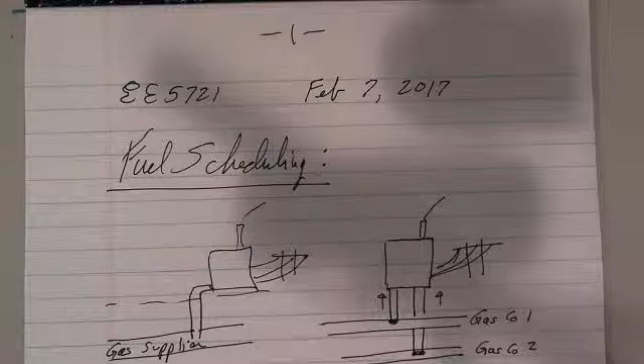But what we're gonna do today is we're gonna talk about fuel scheduling. We're gonna deal in the beginning here with the kinds of contracts that they deal with gas suppliers.

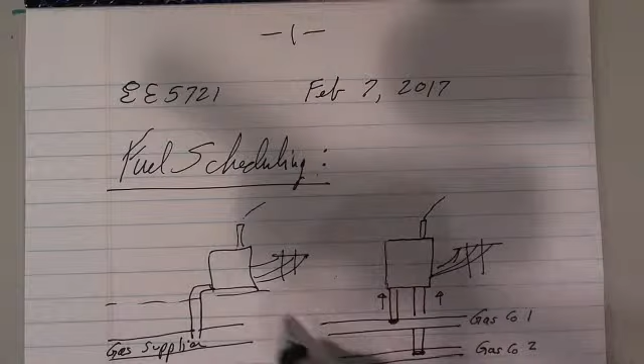So once again, we've got a gas pipeline. This may not be the only plant that's being supplied by this gas pipeline, and this one has two pipelines, but there's a capacity. Let's put something in red here. There's a capacity restriction on the pipeline itself. We'll put two arrows like that. In other words, you can only push so much gas through this pipeline, but that's sort of understandable.

And by the way, the gas pipelines are very long distance. They run from the Gulf states like Texas, Mississippi, Alabama, even Florida, way up into the northern parts of the United States. In addition, there are gas suppliers in Canada that have gas pipelines that come down into the state of Minnesota, run through Minnesota, cross into Wisconsin, up through the Upper Peninsula of Michigan, and down into the state of Michigan. So there are gas pipelines coming both directions into the U.S. to supply large amounts of gas.

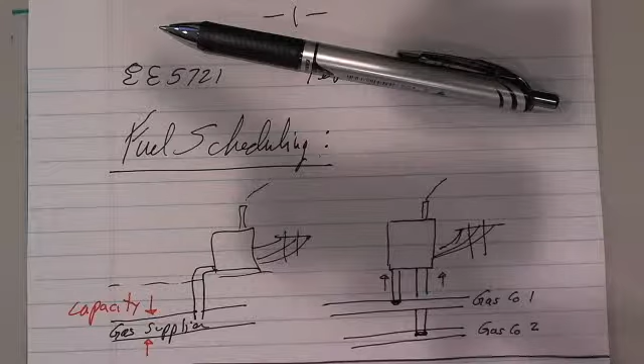I'm chuckling because during the 1970s, early 1980s, Ronald Reagan was president, and suddenly he said, we're not going to be selling certain kinds of things to Russia. He was a very hardline president, and yours truly, that's me, had a contract with a company in Europe, and we weren't selling anything to Russia, but they were imposing all kinds of rules, and this company was going to sell the software product that we were supplying to them. They were going to sell it on a system that was going to go to one of the other so-called, I use this term because it's an old, completely outworn term, communist bloc countries. Well, countries like Russia and its eastern countries around it, and we got caught up in one of these things. But it was originally because of this gas pipeline, huge gas pipeline they were bringing in from Russia.

So it's a major business. Now today in the United States, we're getting gas not just by putting a pipe down into a big bubble of gas underground and then pumping it out, but we're doing what they call fracking, where they cause the gas to be released by minerals, shale, and so forth underground. And this has produced a huge amount of gas, and the U.S. is now starting to export the gas by liquefying it. They liquefy it and then they put it on ships that take these special containers to Europe, to Japan, and so forth. So natural gas is a big commodity.

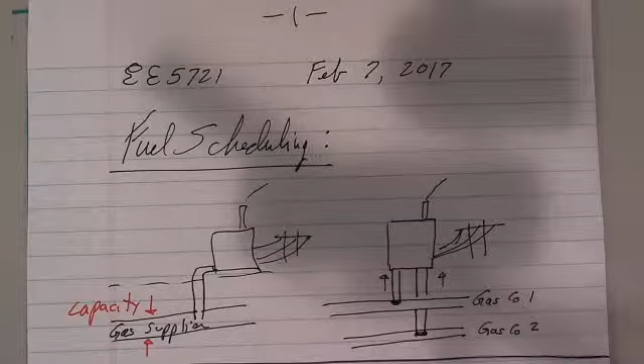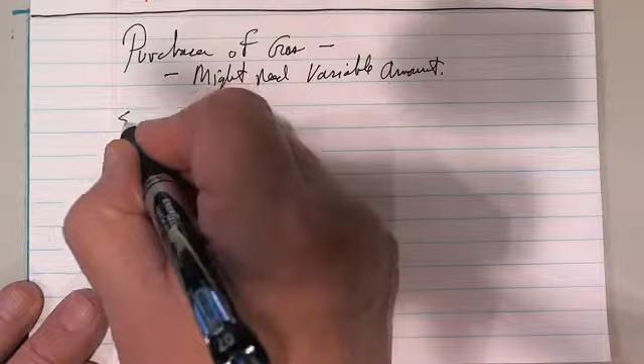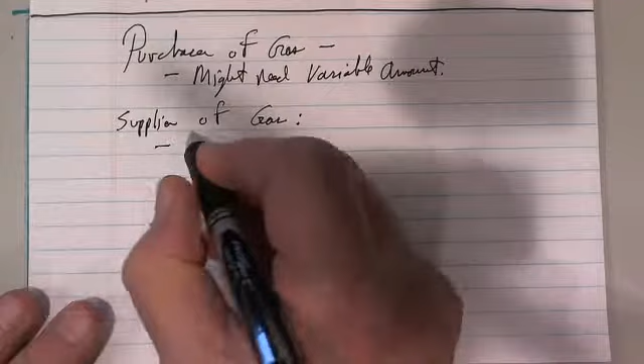All right, so here's the other problem. The natural gas supplier— let me say the purchaser of gas might need a variable amount, because of the load. Because the electrical load goes up and down, and as the load goes up, the generators call for more BTU per hour, which translates down into more cubic feet of gas per hour going into the plant. So they might need a variable amount. But the supplier of gas is nervous about and would like to supply a fixed total. Let's just write cubic feet. Okay, fixed total cubic feet.

And it's very interesting. They have worked on this for a while, and they've come up with a term. And the way I'm gonna show you this is that later on we'll realize that the term itself is kind of a misnomer. It doesn't really say it right. So we'll put it in quotes: a take or pay contract.

If you buy gas, the initial thing says, okay, we specify—let's say Q is the original quantity, cubic feet of gas. That's in the contract. It says you're going to buy so many, 100,000 or a million cubic feet of gas. And it's got a time on it. Okay, so let's say we're negotiating. It says by end of the day tomorrow, or by the end of the week, or something like that.

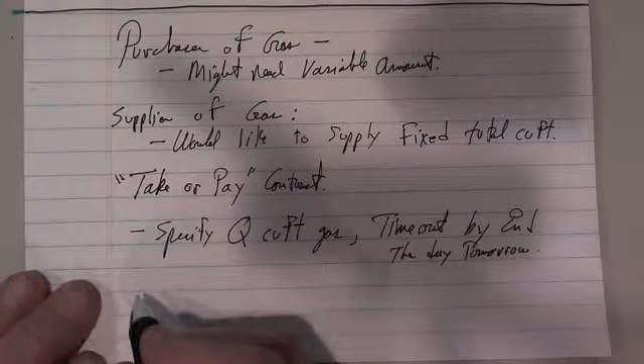Now here's the rub. Take-or-pay says: if purchaser does not take Q, they pay anyway. So sometimes I used to say this should be called take-and-pay, but effectively what it says is you agreed to take Q, and suppose the load is down and so forth, and the purchaser says, yeah, I know I agreed to buy Q, but I don't need it, and the supplier says, that's too bad, you're going to pay for that. You're paying for the whole contract. And whatever gas you don't take, the supplier can now deliver to somebody else.

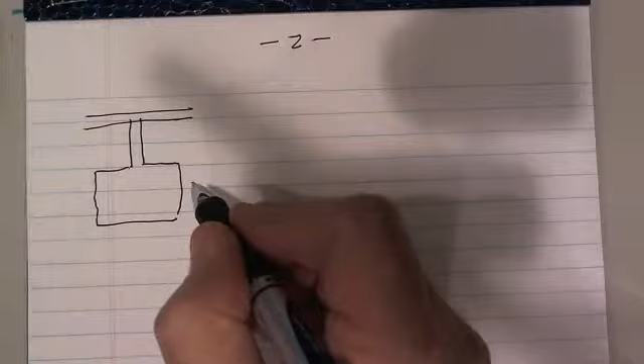One thing that is also part of this - the natural gas system is nice for the following reason. You've got a gas pipeline like this, and you can have a pipe that just goes down into a big storage tank in the ground. Well, they don't build a tank out of cement or anything - it's usually an abandoned mine, for example, where they can pump gas into it and build the pressure up, and it doesn't leak out. It's hundreds of feet below ground. So they can pump gas in, then later on take it out. So it's storage.

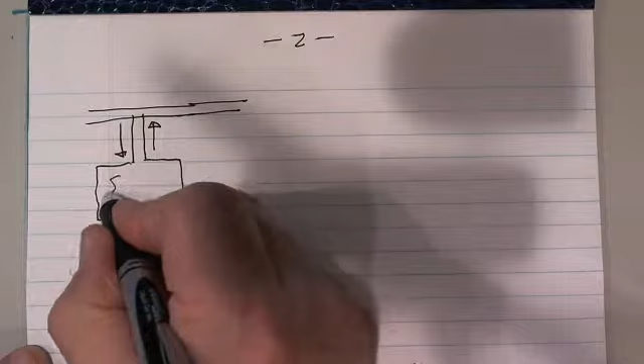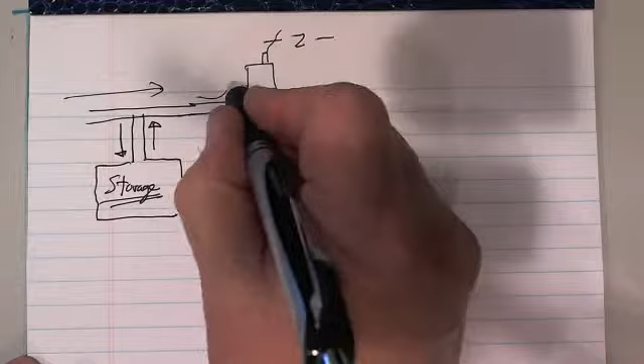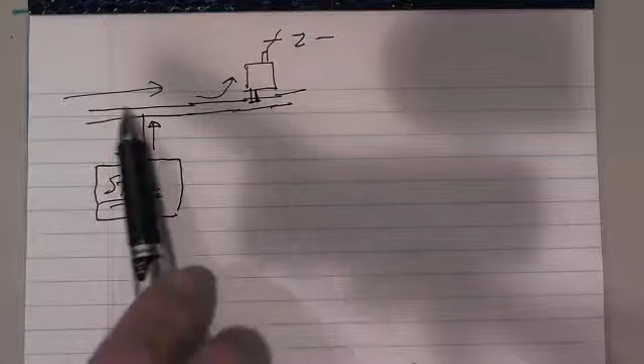And storage means they can be running the pipeline off-hours into storage near the load, and then take it from storage. So if you're running a power plant over here, here's our power plant, and we've got a contract to buy here. Here's our pipe coming in, and normally the gas comes down into the plant, but we contracted to buy so many cubic feet, and we're not going to be able to use it by the end of the contract. Well, the supplier can then put it into storage and sell it to somebody else. I mean, it seems unfair, but that's the way these contracts are set up.

I was looking at Wikipedia, a little discussion of it, and they point out that once you decide you can't buy all the Q, they may charge you a slightly lower price, but you still have to pay for the gas that you didn't use.

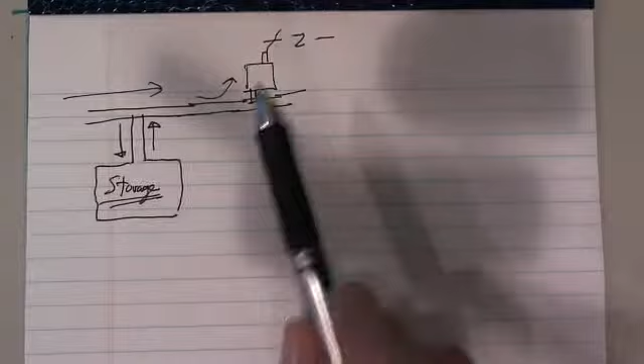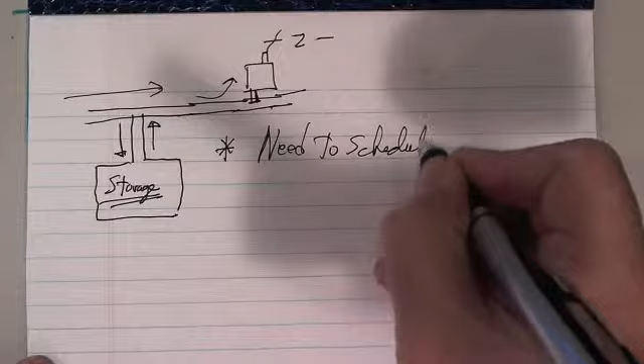And so it pays to schedule things. Okay, so the important takeaway here - we'll put a little star - is that we need to schedule the power plant consumption to use the cubic feet in the time period of the contract. We'll put an exclamation point at the end there. So you need to make sure that you use the gas, because if you don't, you're still paying for it. So that's like taking money and just throwing it out the window, if you will.

It says I'm not going to get the gas - the supplier is going to give it to somebody else, but I still have to pay for it. It's like paying a penalty, and you don't want to do that. That runs your whole plant efficiency, your whole system efficiency down. So this is a very important thing on gas.

Now you still have similar problems with fuel scheduling - another one, and we have a homework problem. I will talk about this week's homework.

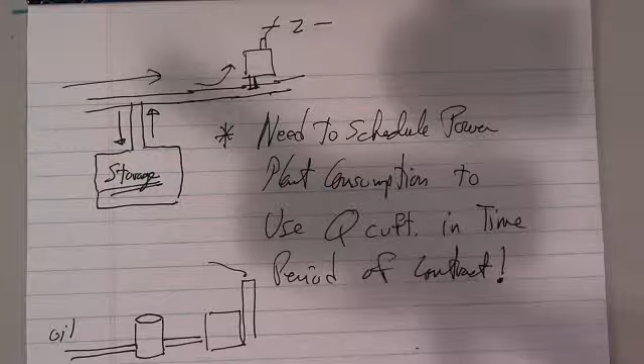If you have a tank at your facility, we'll put the standard stack here, and so we've got oil coming up in a pipeline. We're getting this oil, and we're pushing it through, and we can put it into a tank, and then we can use it at a greater rate than the oil can be delivered in the pipeline.

So this is a scheduling problem that we'd like to work on, and you understand here in this case the oil tank is owned by the power company.

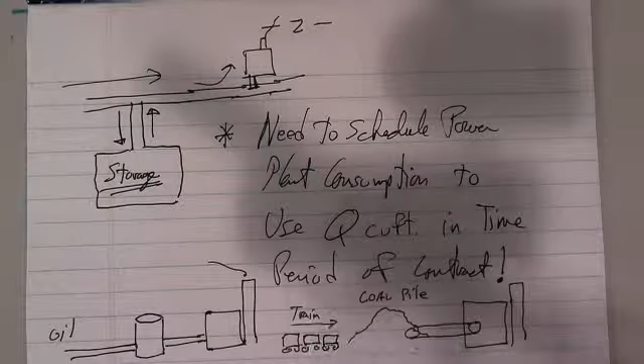If your plant is near a river, they will deliver coal on river barges. I don't know if they still do that on the Mississippi or not. They certainly used to.

And then one of the hazards, and it's a hazard for the train too, but especially for the barge traffic, is to get the coal through when the river might freeze. And if the river freezes and you can't get the coal, then you got to shut the plant down.

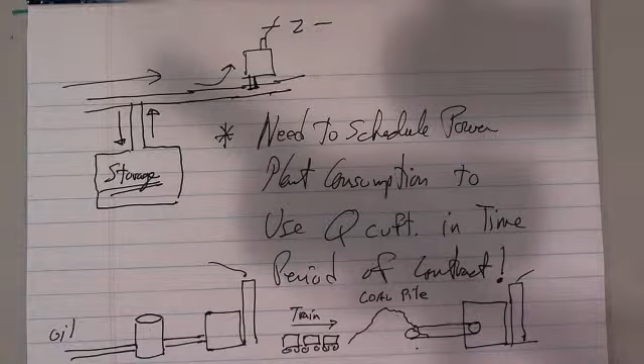So there's scheduling of the coal pile. There's scheduling of an oil tank. We could write this here: oil tank. And to some extent, but generally the storage is owned by the gas company, not the power company. So the gas company stores and releases gas for its own purposes, and you don't get to schedule it. Okay, so this is the so-called fuel scheduling problem.

Now, without going into it too much, I'm going to go into the Lagrange formulation. We're going to have a whole bunch of power plants over here, and they're going to supply power into the grid. And then I have another one over here I'll call that T.

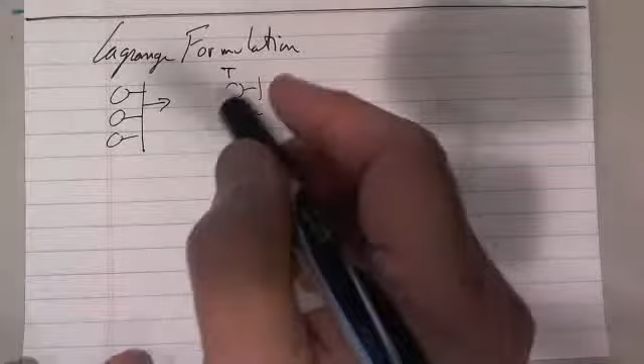That's my take or pay. Take or pay, as I said before. Take and pay would be a better way, but this doesn't ring. So anyway, take or pay is this T unit here, and it's also supplying power into the grid. And we're gonna, let's say this goes 1 to N over here.

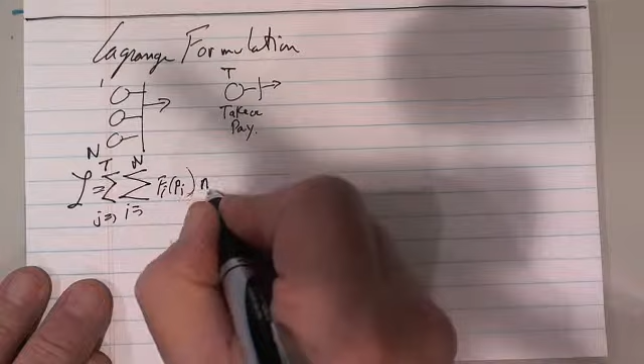And the Lagrangian is going to say, well, look, it's the same problem that we've always had on plants like this, where we just have Fi of Pi. There's a new variable that comes along, and the fact that we're going to be optimizing over a time horizon, j equals 1 to, let's say, a time horizon like t, i equals 1 to n. I'm going to have an nj. And nj is equal to the number of hours in the period j.

So, for example, I could have 4-hour periods, so I'd have 6 of them per day. Or I could have 8-hour periods, just 3 per day. I could have a daytime, an evening, and a morning time, just to have 3 different periods during the day. Or you can go right down to 1. You can have 24 time periods and so forth.

So that says minimize, do the standard economic dispatch up here. And I'm going to have a lambda for each period. This is a lot like the unit commitment, j equals 1 to t, and I'm going to say lambda sub j times p load j minus the sum i equals 1 to n, pij minus ptj. Well, this is p of t coming out of the take or pay plant. So that all the generation must equal the load.

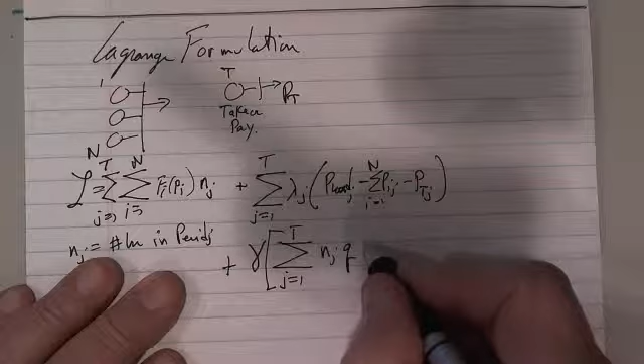Same old thing we did before. But now I'm going to add another constraint that looks like this. It's got another Lagrange multiplier called gamma, and I'm going to multiply that, and I'm going to say over all the time periods, j equals 1 to t of nj q, q of tj minus, and you can write it as I wrote it in the text, we'll write it this way, q total. So this is the constraint. We'll put this in red.

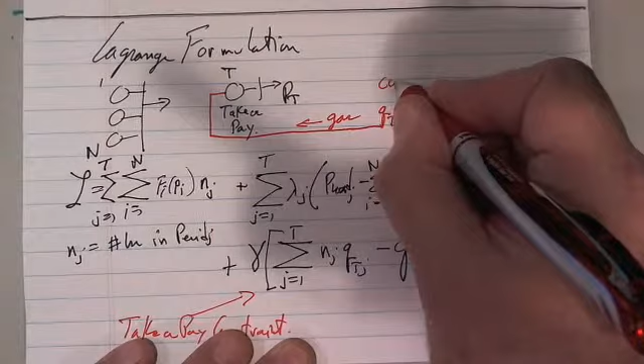This is the take or pay constraint. It says over this time horizon t, Q of t is the amount of gas. Let's draw that over here. Here's gas going into the plant, and it's going to draw Q of t, which is the quantity, measured in cubic feet per hour, and that's a function of P of t of j.

And it simply says I have to have a function like this, so I should have put Q of t of P of t sub j in here. So that says I sum up the gas used in each of the time periods times n, and I add that all up, and that better equal the total, if this is 1 day or 1 week, whatever the total time is, that's the contract amount.

Okay, we can put this in here with a star. Contract, right there. And you notice that I don't have a fuel function for this, because at the very beginning I agreed to pay a fixed dollar amount for Q total.

I'm not gonna go back to the example where the rate that you pay for the gas, if you don't take all of it, changes or something like that. Let's assume that the gas company comes to you and says, have I got a deal for you? I'm willing to sell you 2 million cubic feet by tomorrow night at so many dollars, period.

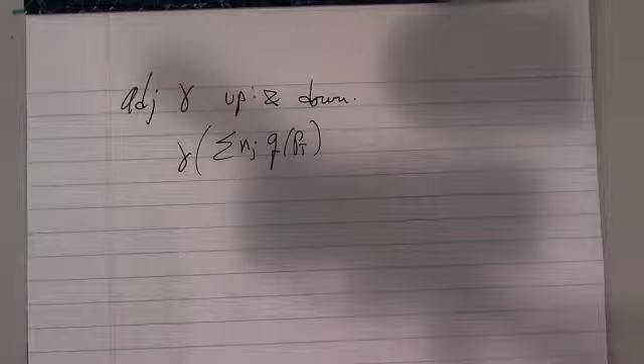Now, if you set this up, the difficulty with doing it this way—I'll just write this down and we'll move on here. You adjust gamma up and down. Well, you notice that gamma is multiplied times the sum of NJQ of P of T. Well, when you work out all the units, the dollars and so forth, here's Q total.

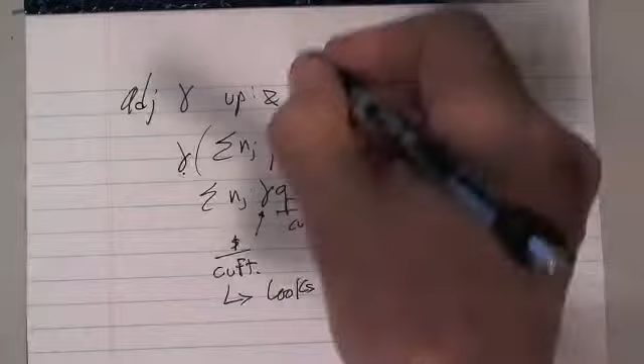This looks like the sum NJ gamma times Q of P, and this is so many cubic feet per hour, and this thing comes out to be the units of dollars per cubic feet. So it looks like a fuel cost, and that's pretty much the way you understand it.

Gamma is a shadow cost. Some people call it a pseudo cost, and what you have to do is adjust gamma up or down until you get the schedule that you want. That doesn't—the gamma doesn't have anything to do with actual fuel costs. It's a number that you're trying to adjust until you get this whole thing scheduled perfectly.

It's not a great way to do the problem, but it at least helps you understand that you can solve it with the Lagrangian method. You see, and at the beginning, I guess I'd have to look at...

Suppose the Q were a linear function—I mean, that were quadratic. Whether or not this whole thing devolves to a set of linear equations, it probably does in that case. And you can solve for lambda for each hour and Q, except Q is—no, you can't, because gamma, this constraint spans all the time intervals, whereas once you fix the value of gamma, then you can separate all the other economic dispatch to one per each time period, given the value of gamma. But picking the value of gamma is not easy.

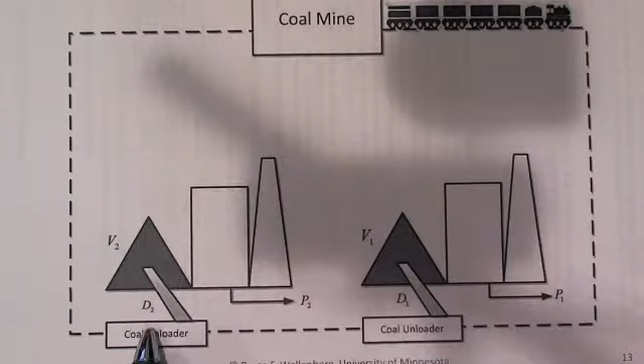Then the coal train goes to the next power plant and unloads the remainder. The deal is that whatever comes in, he has to unload all of it, either most of it here and then the remainder here, or vice versa, or equal, it doesn't matter. So there's a D1, V1, and a P1, D2, and so forth.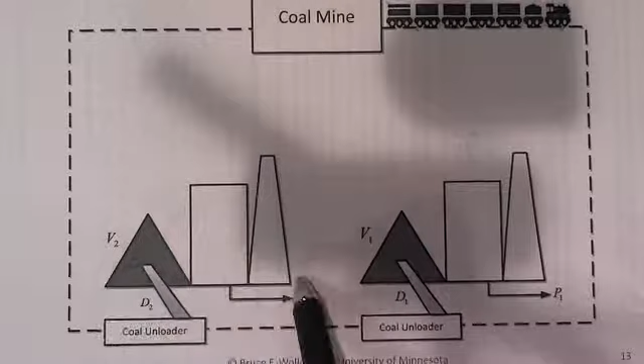And he goes around for three weeks, and there's a schedule of power over those 3 weeks, and the problem is purposely set up for linear programming. The neat thing is not so much that I can set it up, as to see what you can do with it to understand what's happening.

So we have the load, that looks, there's 3 weeks, 1, 2, 3, and it's 1200 megawatts, and then it goes way up to 1500 for the second week, and then it comes down to 800. Now this is looking at it, saying for a whole week the power is just constant.

Well, let's say it's supplying this into a large system, and that's the contract for those 2 plants that it supplies.

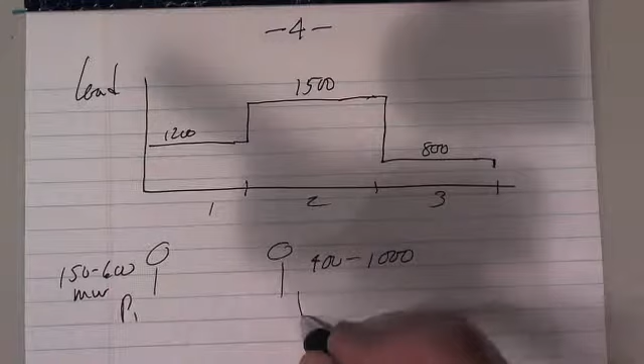All right, so I've got these two plants, and each one can go from 150 to 600, and the other one can go from 400 to 1,000 megawatts. So we'll call this P1 and P2. And we give you an F1, which is a linear function, and F2 is also a linear function. And then we also, from this, we can calculate a Q1 of P1 and a Q2 of P2.

How much coal does it use, this is in tons per hour, and then we can start setting up constraints.

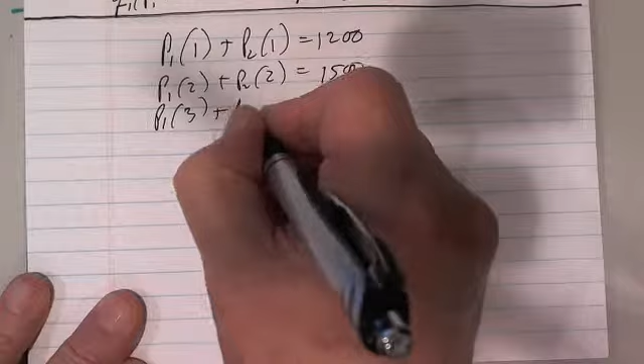And we set up constraints such as P1 of hour 1 plus P2 of hour 1 equals 1,200. Similarly, P1 of 2 plus P2 of 2 equals 1,500. P1 of 3 plus P2 of 3 equals 800. So those are the loading constraints.

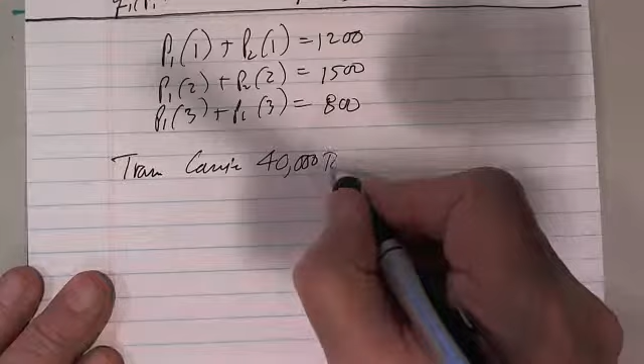Now, we say that the train carries 40,000 tons in the hopper cars. Incidentally, what also makes this a very interesting problem, as far as I'm concerned, is that there's a name for this kind of train, where it's got nothing but coal cars. I'll write it on here. It's called a unit train. We'll put it in quotes.

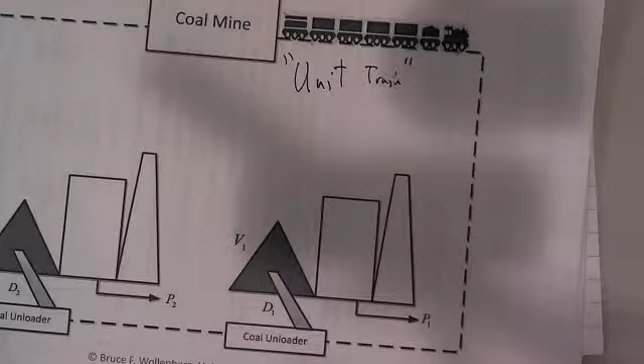Look that up on the internet, look it up on YouTube, and you'll find movies of these unit trains bringing coal to power plants. Trains that are hundreds of hopper cars long. They load them up with coal at the coal mine and bring them to the power plant. It's called a unit train, and it does nothing but haul coal.

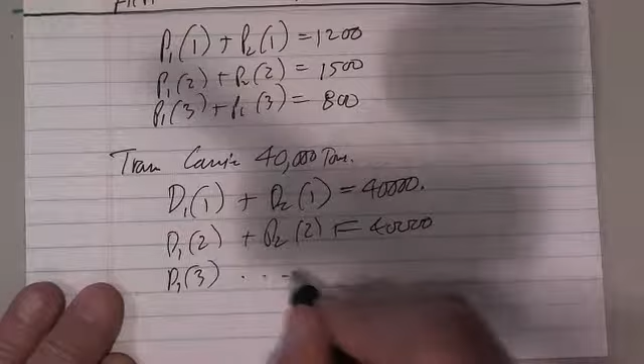And so it carries this much. So we say then, well, the delivery of coal, D1 of 1 plus D2 of 1 must equal 40,000. We're going to deliver, and we have one for D1 of 2, D2 of 2 equals 40,000, etc. D1 of 3, etc. equals 40,000. Now we'll write it in there: D2 of 3. So I'm going to deliver 40,000.

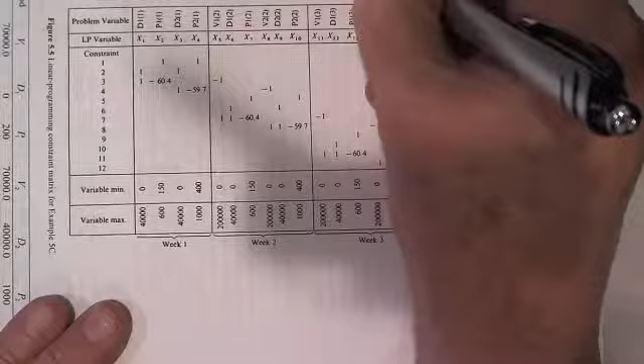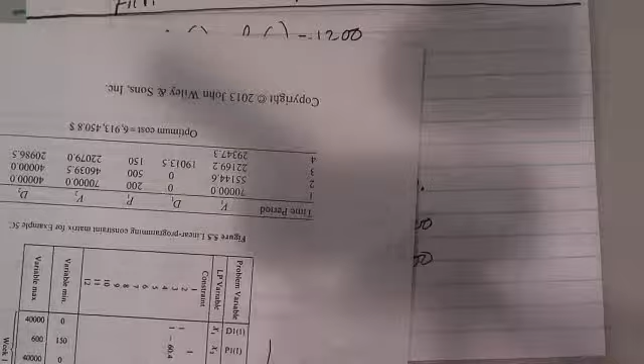And you'll notice that some of these... and then I named the variables across the top here. Variables. Let's pull that out so you can see it. So there's the variables going across the top, and you can see them listed off over here. So if we turn it this way, there's D1, P1, D2, and P2 with a 1 subscript, meaning this is week 1, or period 1. Period 1, period 2, period 3.

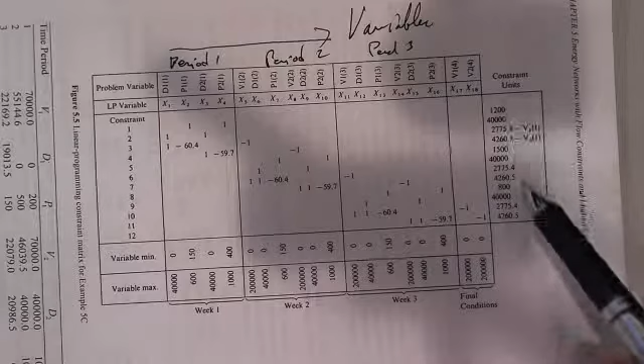And then there's certain ending conditions, and there's certain restrictions. So these are all the linear constraints. There are constants in the linear constraints. There's a couple of constants over here. Let me put this in red. Right here, these are...

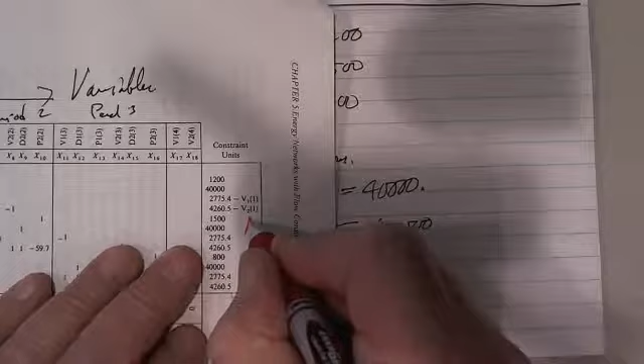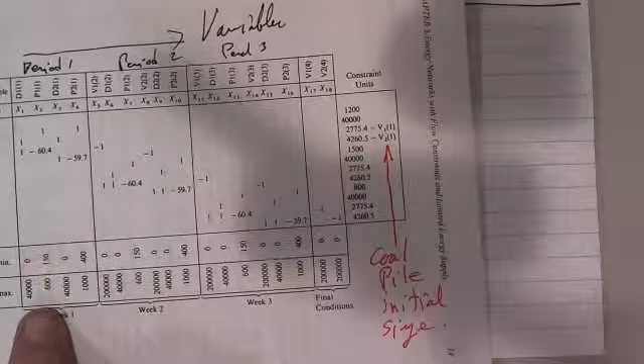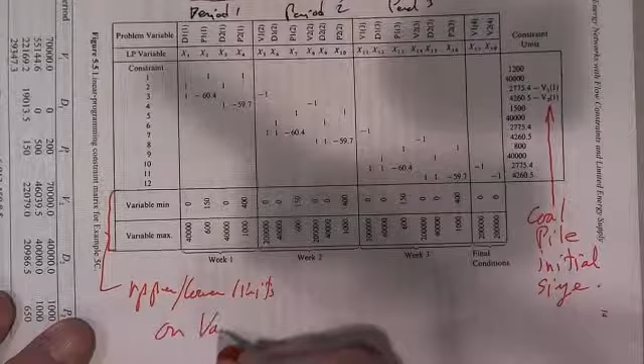Coal pile initial conditions — initial size, let's put it this way, okay? So if the coal started out at a different size, we told you that it starts at a certain size. And down here we have the limits, the upper and lower limits. So these are the variable min and variable max, the upper and lower limits on the variables, and that's all in the text.

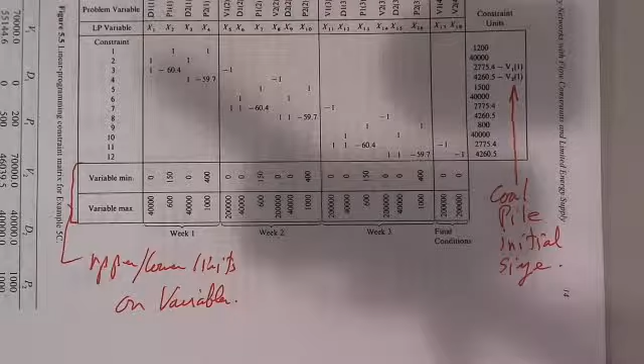Then what I did, and I don't have a copy of it to put up on the screen here, but it's already loaded, or it'll be loaded on in the homework 4 directory. I'm going to give you a MATLAB program that's got this basic tableau built into it, and it solves — you have a MATLAB code that solves chapter 5 example 5C.

That's the first, that's the basic LP problem. And then the homework asks you to go look in the back of the book, the back of chapter 5 in the textbook. There are 3 problems that ask you to make some sort of change to something. And you have to figure out how to do that and solve. Once you do it, you just change the numbers in the tableau, or wherever you can change the limits, you can change these initial conditions, whatever, and you can then resolve the LP, and from there you get an answer. That's really an exercise in how to recognize what to do.

So it's kind of a trivial problem. Well, yes, it's trivial, but the point I want to make is that if you're a group at a large generating company, dealing with several different gas suppliers, they call you up on a Thursday and say, 'Hey, have we got a deal for you? We're going to sell you so many million cubic feet at this price. Must be consumed by Friday at midnight,' starting Friday at the beginning of the day. So you've got 24 hours on Friday, and you've got to use this up. Do you want the deal or not? And you have some time — you say, well, we'll get back to you here in an hour. Okay.

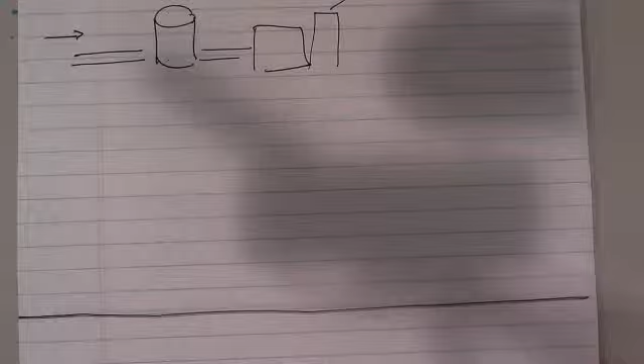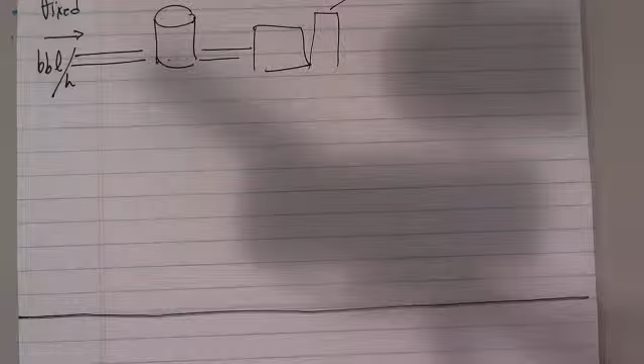Now the other problem we're going to study, this is problem 5.6 in the text: you have a pipeline, and it's going to deliver a fixed amount into a tank, a fixed input per hour, fixed barrels, BBL, the abbreviation for barrels per hour coming in. I think it's 500, whatever the number is, fixed over the time horizon we're working with. We're going to say this thing starts at 3,000 barrels in the tank. There's a Q, which is a function of P, putting out P, and a given load to be scheduled. I want you to use dynamic programming to solve this problem.

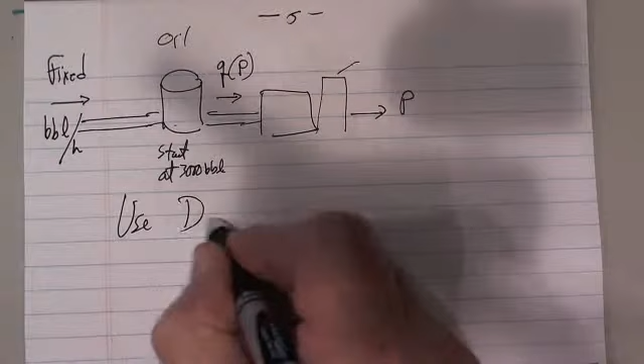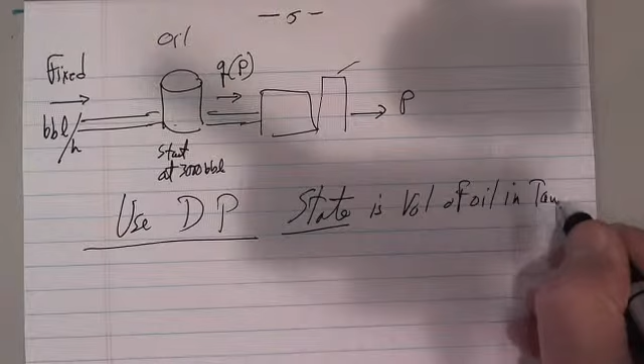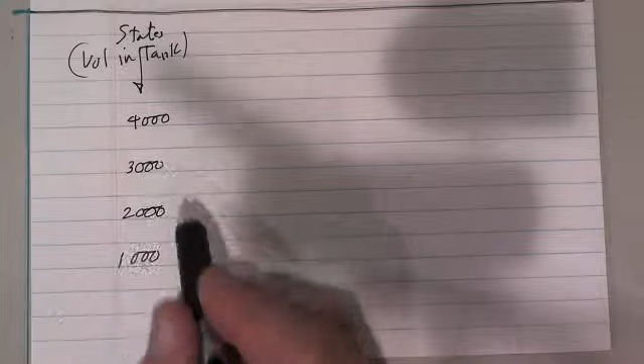So let's start out and talk about using DP. The state that we're going to use is the volume of oil in the tank. I'll start here on the bottom of the page and come back up to the top. Here is 3,000, and I'm going to allow you to consider these as the states - the volume in the tank could be 1,000, 2,000, 3,000. I don't want you to worry about it going down to zero; we're not going to let it go that low.

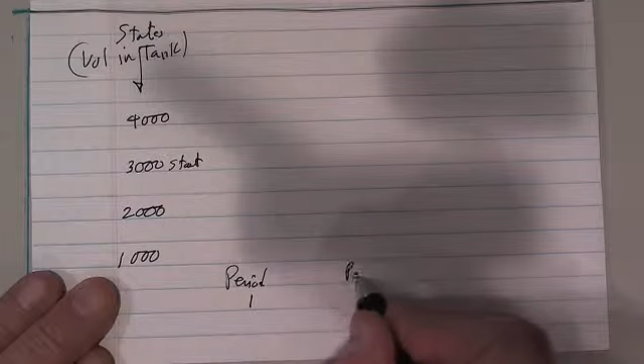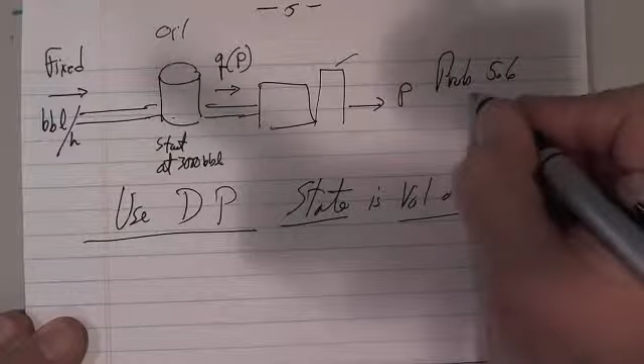It's going to start right here, and we're going to have period 1, 2, 3. This is problem 5.6 in the text. I want you to use DP. In this instance, we're going to use dynamic programming, and we've got a fixed amount coming into the tank.

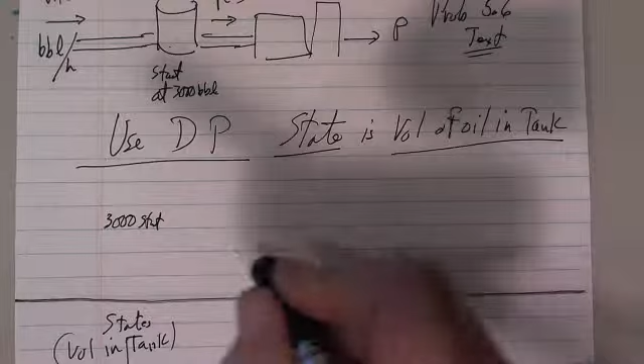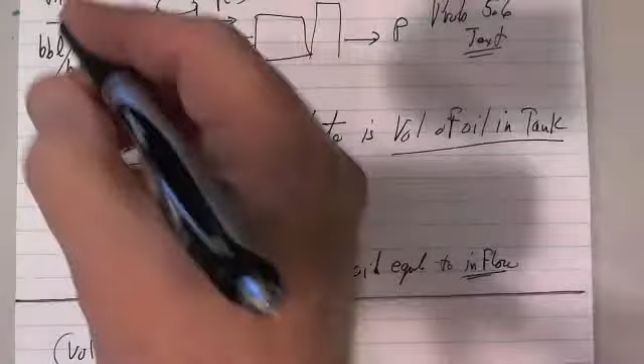Now let's talk about the states. I'll redraw this a few times, but let's say the tank is sitting at 3,000 up here, and in period 1, the plant uses oil exactly equal to the inflow. So this is the inflow up here - it equals the inflow. Well then what's going to happen to the volume in the tank? It's going to stay flat. So the amount of P - the plant uses it - let's say R equals the inflow, and in this case R equals Q of P1. So whatever Q of P1 equals, R, well that means the volume never changes. The oil comes in and goes right into the plant, and the level of oil in the tank stays constant.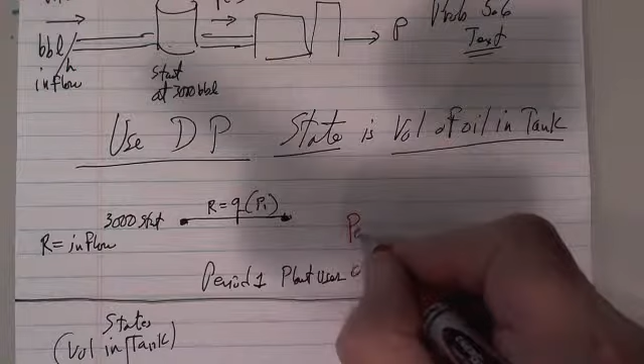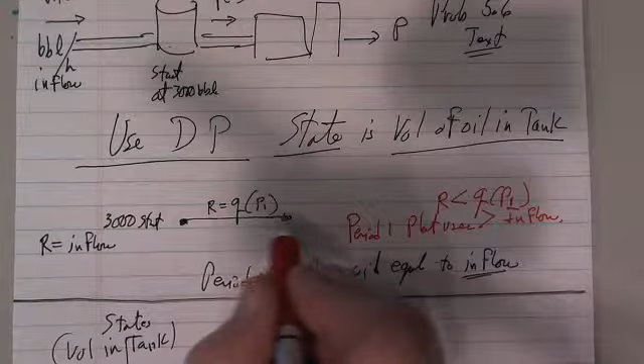Well, let's suppose on a different note now, in red here, period 1, plant uses greater than the inflow. That says R is less than Q of P1 - the inflow is less. What is this thing going to do? It says the plant uses an amount greater than the inflow, so what's going to happen? Well, it's going to go down. So this is where R is less than Q of P1. Let's see if we could use this color.

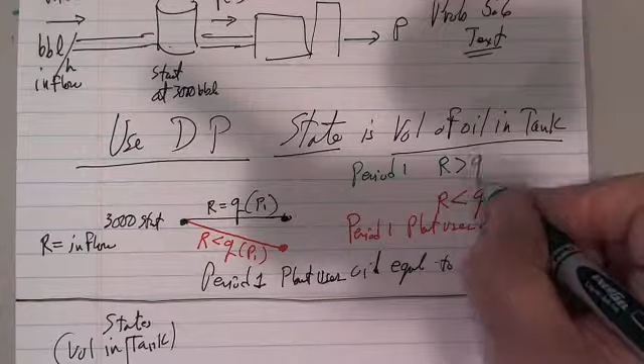So I'll use a green here, and I'll say suppose for period 1, R was greater than Q of P1. So inflow is greater.

Well, if the inflow is greater, then the tank is going to fill up. So here's where R is greater than Q of P1. Once again, the volume can go up, stay constant, or go down. It can go up if I'm not using the fuel as much, and there's a possibility this plant is operating against other plants, so you could let the other plants supply the load. This plant doesn't operate, so the inflow just fills up the tank, and that's the green. Black says it uses exactly what the inflow is. Red says it uses more, so it's drawing the tank down.

And what this problem is concerned about is that you start here, and at the end of period 2, you end here. So we have states that represent dots, just like we did in unit commitment with dynamic programming. And now it's a matter of finding a path.

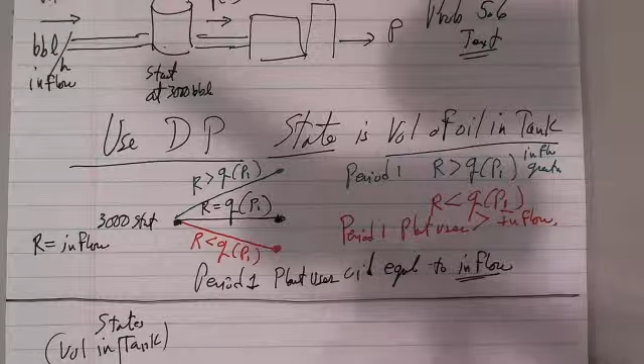Now, what's built into the problem, what is so nice about using dynamic programming here, is that this might be the max for the tank, and this might be the min. We never want it to go below 1,000 or above 4,000. So by using this state method, I've automatically scheduled it to obey the max and min storage capacity in the tank.

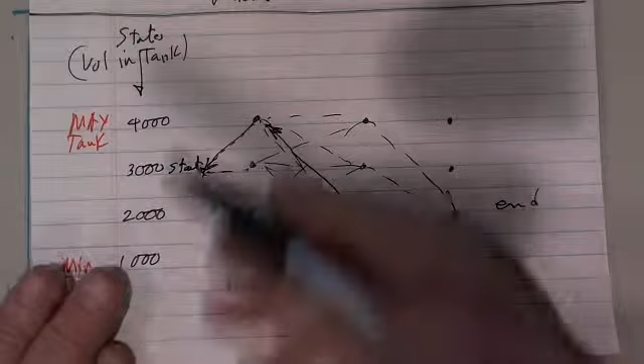And I can schedule, remember, I've got a different load in each of these time periods. So the power plant that's operating here and the other power plants, there's an equivalent for the other power plants, and they operate against each other. Let's draw that. So I have this tank one here with a tank coming in.

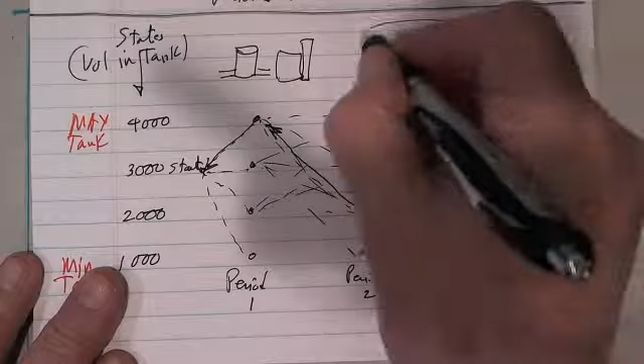And then I have several other power plants that I just draw like this, and I lump this into one equivalent big plant. And I give you an F of P over here, and this is P of T, or the equivalent of all the rest of the plants. It's sort of an equivalent of your net generation and the rest. This is the P for this plant over here, and you're trying to minimize the overall cost of doing this.

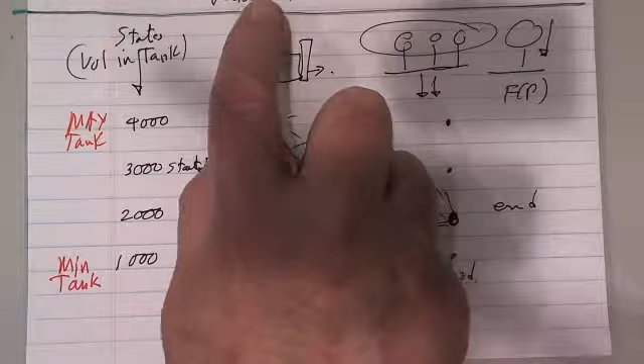Now with the oil, if you have a contract that says the oil company is going to deliver so many barrels per hour down that pipeline, I've paid for it. That's fixed price. So I just need to make sure I don't use too little or too much from the tank. I've got to keep it within these limits as I go across here, and I've got to follow a path. If it ends up going up, that means I'm not using as much as it's delivering. If I come down, I'm using more than it's delivering, or I can go flat, which simply says I'm using the exact inflow.

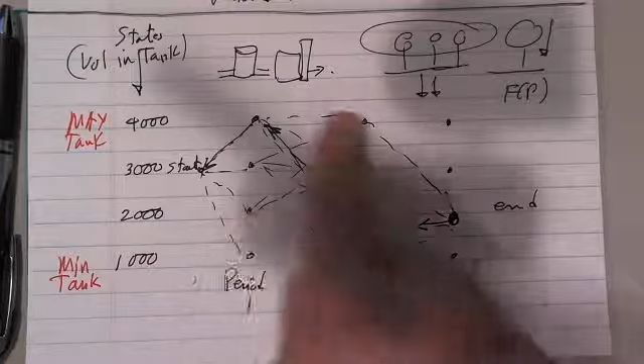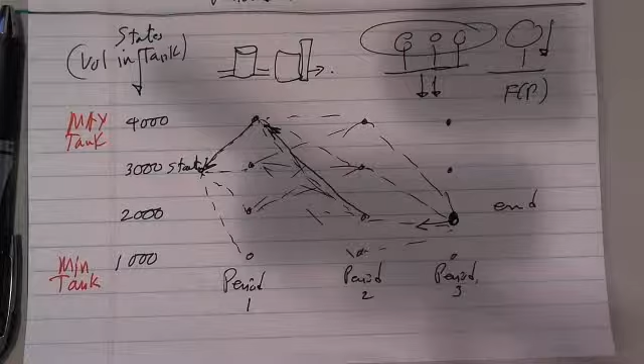Now what we're going to see, to be honest with you, is that it's the exact same procedure with a few more complications for hydroelectric, where instead of a tank, we're going to see in a hydro plant, let's get this hydro. We have a river coming down here, and we have inflow, and we have a big reservoir sitting out here, and here's our hydro plant.

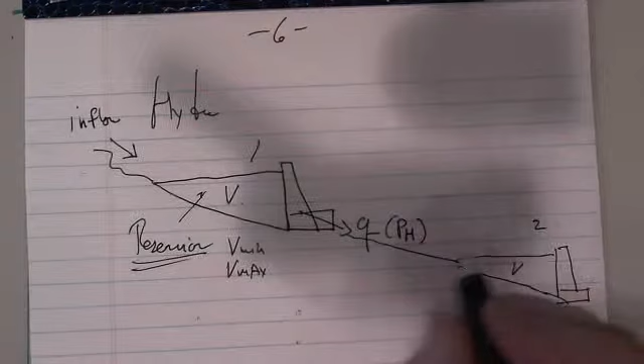This is the impoundment. Here's our reservoir that has a certain volume in it, with a V min and a V max, and there's a certain Q coming out, which is a function of P_H, the hydro. But what makes a hydro system very interesting is that we can have two of them in series. Here's another one down here. So here's plant number 1, and here's plant number 2, and the inflow to this one is equal to the outflow of this one. Maybe there's some other streams coming in.

The system in California, it's about PG&E. I was acquainted with an effort that went on in the 1970s and early 80s of writing a complete hydro scheduling code for all the hydro systems in California. Very complex system. I also saw the effort that went into a hydro scheduling program for the Spanish system in Spain.

There's a company in Spain called Iberdrola, in northern Spain with the Pyrenees Mountains. They have an unbelievably complex hydro system up there. We're going to get into that next week. I won't go on into too much about hydro, but you can use similar dynamics for scheduling hydro systems.

I want you to see that oil tank problem as a similar problem where you have storage, and you just make the volume in the storage the state for the program. Now, if you have to have nonlinear functions and a lot of fine granularity in the problem, instead of having 3 or 4 states like I did, you could have 50 or 60 states. But now dynamic programming gets excessive, and you're better off with a linear program or something like that, which we will also cover next week.

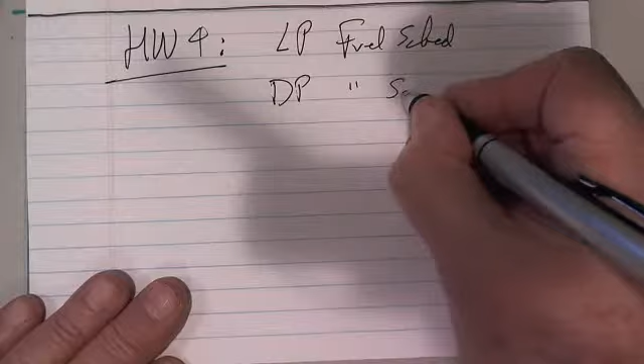So your homework 4 is going to cover LP fuel scheduling, and it's also going to cover dynamic programming fuel scheduling. And then homework 5 will deal with hydro scheduling.

Look at this thing, it didn't... come on, refocus. There you go. There's a button on here that says autofocus, and it seems like it goes to sleep. I don't know why. All I know is that if I put my hand under it and move it up and down, that seems to wake it up.

You're going to apply LP and dynamic programming to doing fuel scheduling, two different kinds of fuel scheduling, and then the homework next week, number 5, will have to do with hydro scheduling. The two lectures on hydro will then complete this section, and basically that will complete the section on generation.

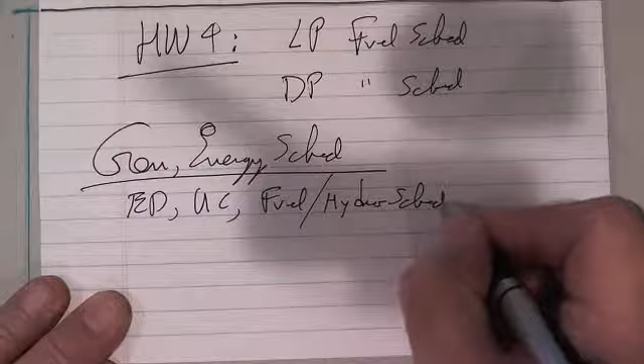So we talk about generation, energy, scheduling, etc., economic dispatch, unit commitment, fuel and/or hydro scheduling. Okay, and that will be the end of a section in this course, and then we will pick up, start picking up sections on how do you schedule these things when you have a transmission system.

You just can't do whatever you want to do with the transmission system. It's got capacity limitations, and it has problems of the fact that the transmission lines are up in the air where they can get hit by lightning, knocked down by weather-related tornadoes, whatever, and so we have to worry about outages and how do you schedule it safely. So there's a whole section coming on transmission systems.